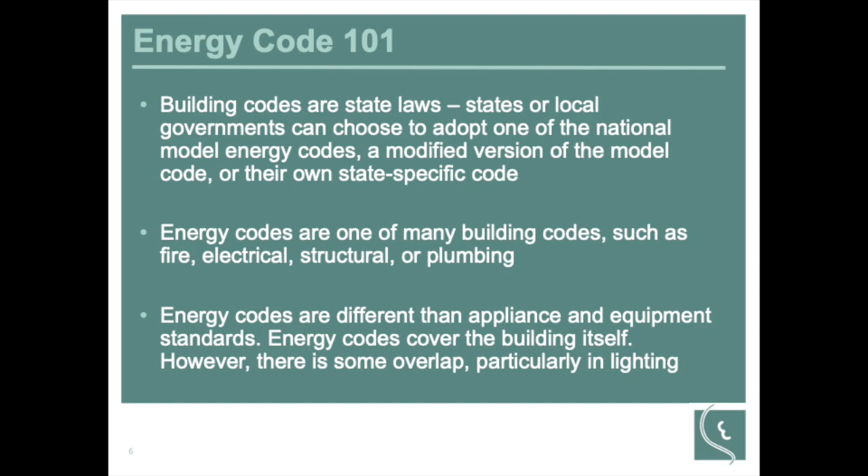To talk a bit about general things regarding energy code, we have slides explaining how energy code is developed, how it's complied with, and how it's enforced. First, the development: there's a national model code developed by two major associations, ICC and ASHRAE.

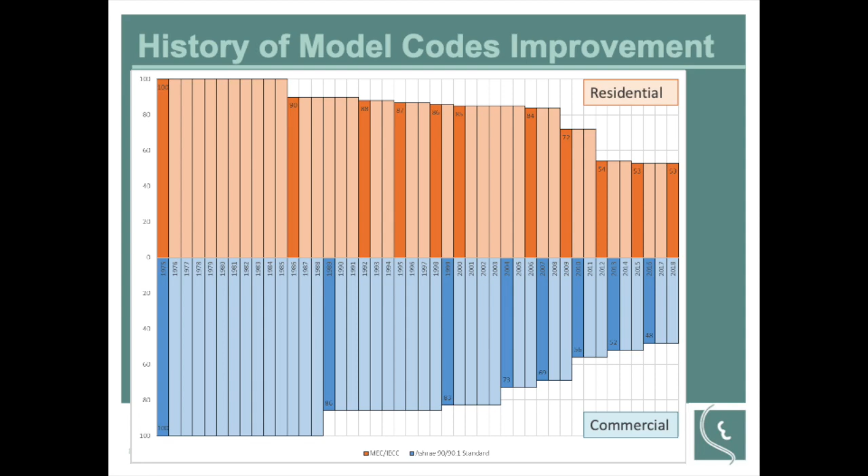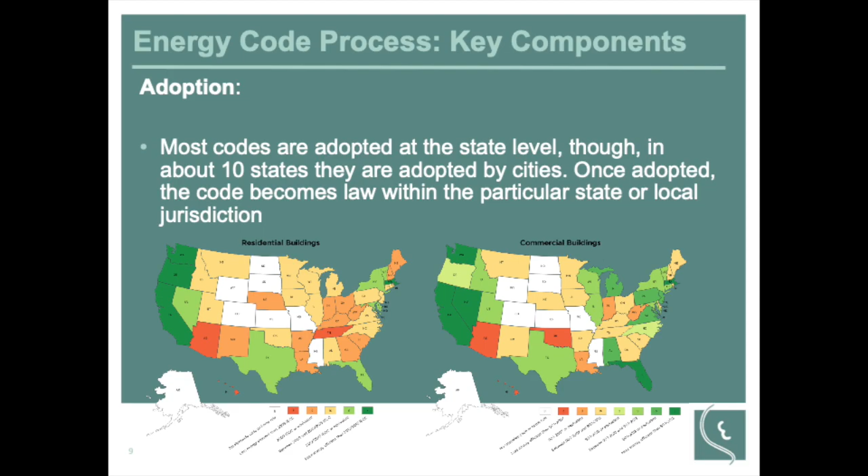So, the adoption process. I think you guys are very interested in when the new code will be effective. Until the day before yesterday, until Thursday, we'd been saying it'll be March 1st, because that's what we heard from CDB. But CDB just told us they couldn't put the energy code agenda on the JCAR meeting's February agenda, so it got pushed. It will not be March. It will maybe be April, if they put that agenda on JCAR's March meeting.

So if you hear others saying SEDAC told us it'll be March 1st, tell them that's updated now, it's not March 1st, it's maybe April 1st. The earliest could be then. CDB is in charge of reviewing and adopting, and now it's with JCAR, which just needs to rubber stamp it, but that takes some time. So maybe April 1st is the new date you need to remember.

Typically it's based on the permit application date. Any project that applies for a permit on or after the new effective date should follow the new energy code. The Illinois Energy Code explains what it is, and all buildings in Illinois should follow it. But one thing I point out is, if you're ever involved in a state-funded building, before, state buildings should follow ASHRAE 90.1, because that's what is written in the Illinois administrative rule.

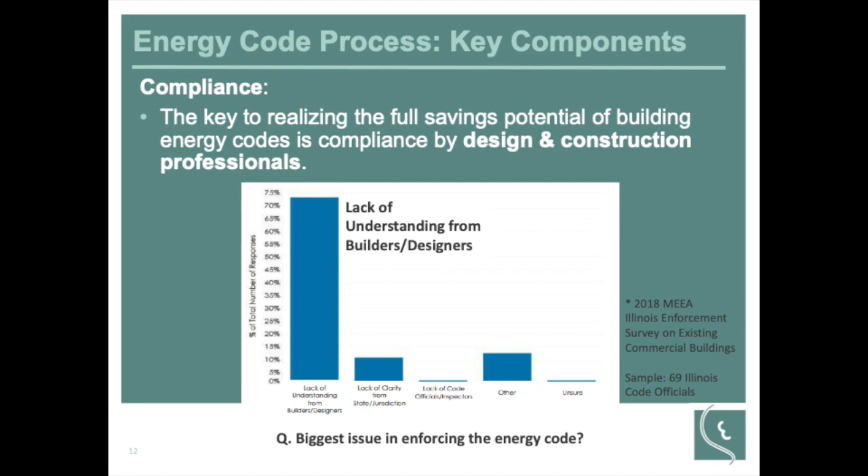So compliance. We look at a study done by MEEA - they have an Illinois Enforcement Survey on existing commercial buildings. They surveyed about 69 code officials in Illinois to find out the status of energy code compliance in Illinois.

They asked many questions, and one of them was: what is the biggest issue in enforcing the energy code? 72% of code officials said it's because of lack of understanding from builders and designers.

There are other things too - lack of clarity from state and jurisdiction, lack of code officials or inspectors, and others. But since we asked code officials, they blame the architects and engineers. I'm sure if we asked architects and engineers, they'd say something a little different. But the compliance is actually done by the architects or contractors who are designing the buildings.

So the importance of compliance cannot be overemphasized. Does this fit with what you guys are seeing in your applications, or where you run into problems? Is it just a lack of understanding, or is there some technical reason causing an issue? What challenges are you finding in the field?

Most of them don't even know. Lack of understanding - that goes to the 75%, call it what you want. Maybe part of it is, do they even realize the state has an energy code at all? Well, they realize it.

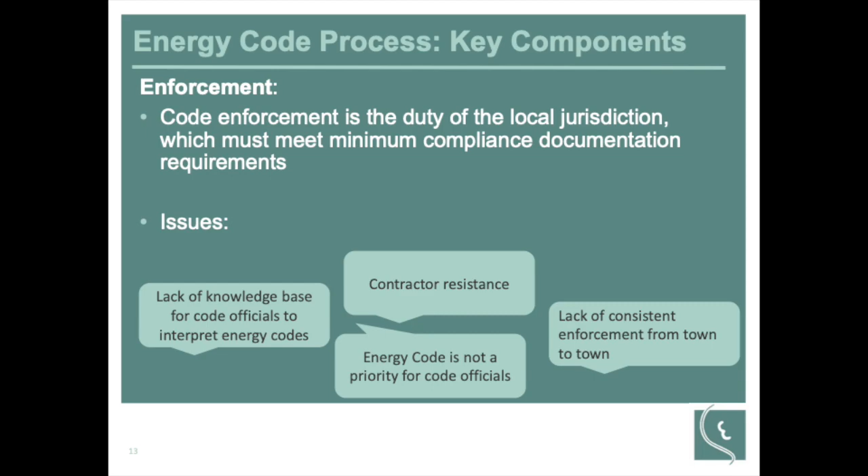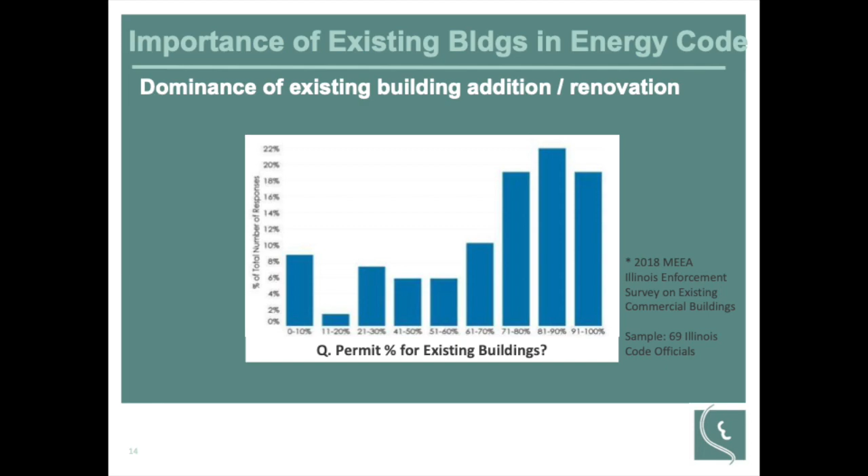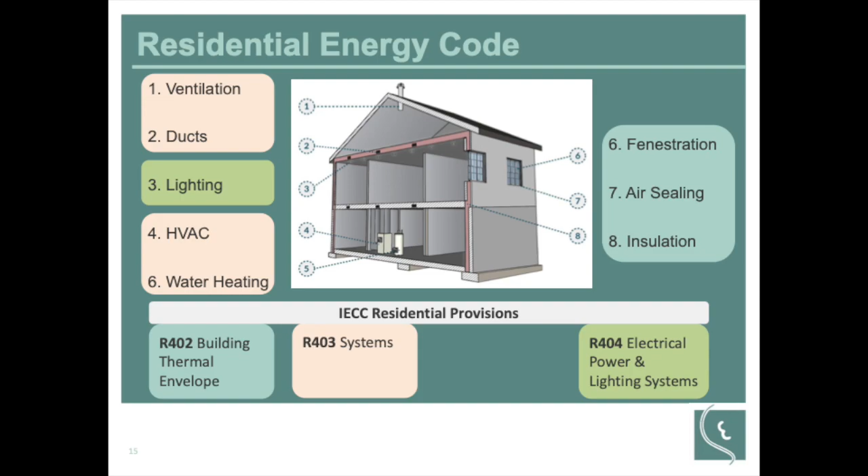The commercial code has the same 8 elements. One difference is that in the commercial code, C404, service water heating has a separate section from the mechanical system. In terms of building components, these are the main ones, and those are the sections that talk about each component.

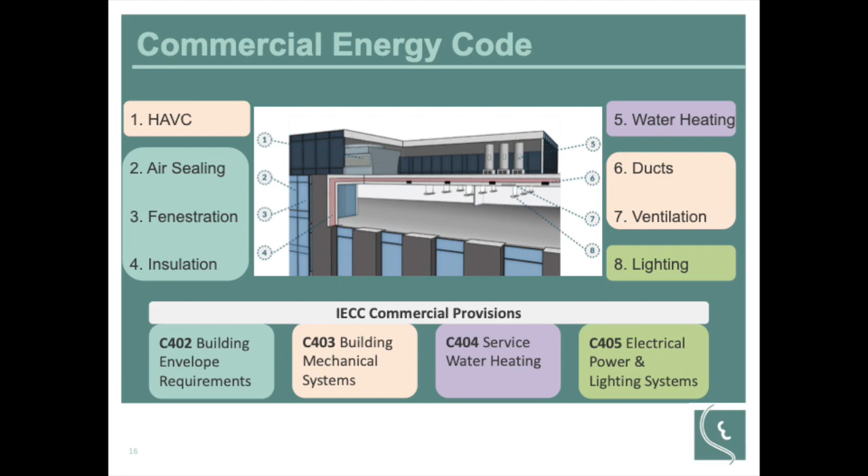For the 2018 IECC, there's a physical book, but you could also go online to our website, follow the link on the slide, and we'll post the PDF there so you can print or refer back later. If you follow this link, there's also a whole free web version of the code, so you can search through and find the exact code language. This is only the IECC.

For Illinois amendments, you need a separate source - under CDB, or you could come to our website where we'll have a link. This is the Illinois amendment, and this is the link to the 2018 IECC. To understand the whole Illinois Energy Code, you need the 2018 IECC book or web version plus the Illinois amendment. Don't forget about the Illinois amendment - it's about 15 pages, but it struck out some language from the IECC and added, deleted, or changed some numbers.

Most of the amendment language goes into the administrative chapter 1, but not necessarily all - there are some technical languages too. For example, there's one about 4 feet below grade for basement or crawl space insulation, and there's an air change rate difference: IECC says 3, Illinois used to say 5, and now we're moving down to 4 for residential. A lot of the changes are administrative, but one bigger one is the definition of a residential building, which is slightly different between the IECC and Illinois amendment. It's not a thick packet, but a lot of it shows struck stuff and what's being added.

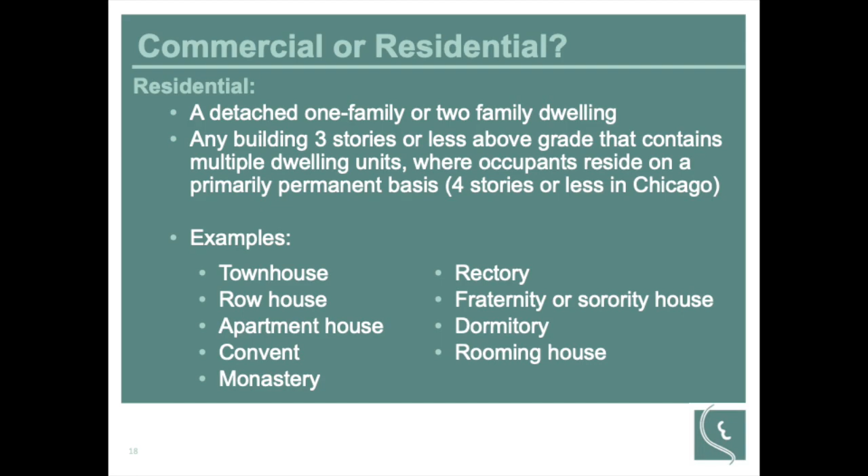What about commercial building? What's the definition of commercial building per energy code? Anything but residential building - that's literally what it says in the definition, because it's hard to define all the little things. If it's residential, fine. If not, it's commercial.

But there's also mixed buildings that have both a residential component and a commercial retail component. What about those? So this is just a quick quiz for us to remind ourselves of the definition of residential buildings versus commercial buildings.

So: a 3-story mixed-use building, 1-story retail and 2-story apartment in Bloomington - is it a residential building or a commercial building? Residential building, because it's 3 or less.

And then how about this: a 5-story single-family home. Residential building or commercial building? Emphasis on single-family, not story. Correct - yeah, it's residential. It's a little weird to see a 5-story single-family home, but if there is one, it's still residential, because no matter how many stories, it's a single-family home.

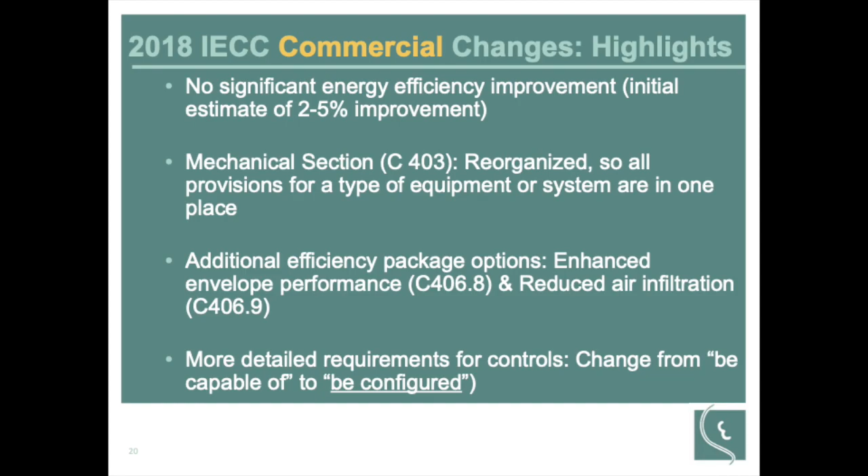Then there's a new appendix in the 2018 IECC. It's called Appendix CA, a Solar Ready Zone, in the commercial section. This appendix was already there in the residential section in 2015, but it's new to the commercial section in 2018. What it is, is it's not a mandatory or required section, but it is an appendix.

It's a reference for future solar projects. These days there are lots of projects thinking about solar, maybe not now, but maybe later. So this is some kind of guidance you could look up to if you are thinking about a solar project in the future for the project. If you are in a municipality, you may be able to make this a mandatory item, but it's not required per Illinois State Energy Code.

And then ASHRAE 90.1 — today's workshop we are mainly talking about IECC, but we are also talking about ASHRAE 90.1 because it is one compliance path that you could choose. I told you that to comply with the energy code, you either follow a prescriptive path or a performance path. For commercial, you actually have three options: you either go prescriptive, performance, or you can close this book and open up ASHRAE 90.1, because ASHRAE 90.1 is one compliance path that IECC says is okay. So in a way, you could comply with the IECC using ASHRAE 90.1. A little confusing, but anyway.

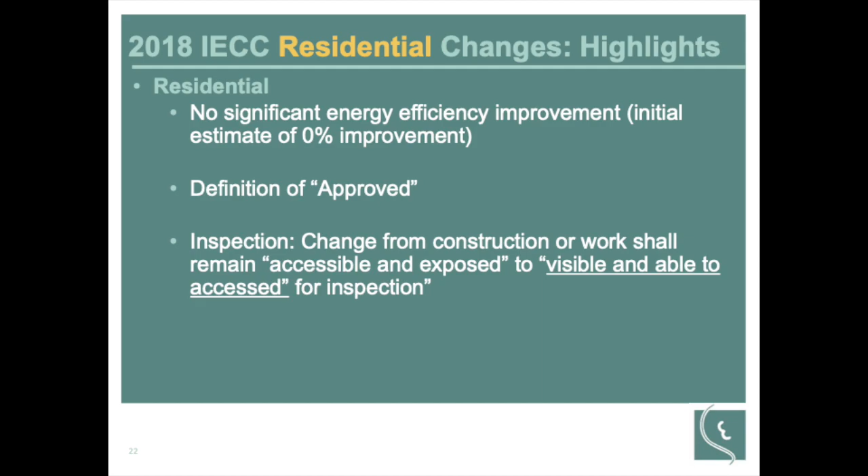So now as a code official, you have more authority and more responsibility, and it doesn't require going through any testing. If you deem that this is acceptable, then it is approved per code. And then for inspection, before it said accessible and exposed, now it says visible and able to access. It's kind of the same thing, but they tried to make it easier to understand and clear.

So that's the 2018 IECC updates. I think from here we're going to talk about component by component requirement changes, and Brian is ready to take over. We're trying to give you details here, realizing this is more of a beginning. This gives you a layout of how the 2018 code is laid out. Sumi mentioned earlier that several of the HVAC measures have been rearranged, and I've found that using the code, it flows a lot better in the newer version versus the older one.

Trying to look at just mechanical systems versus service water heating. In residential, they consolidated because there's almost nothing in service water heating for residential. On the commercial side, something we talked about is why should someone comply with an energy code? Other than, yes, it's state law, the energy code is really more about looking at building science and safety, because there are certain things, like noting here, there's a change as far as if you're doing a heated slab.

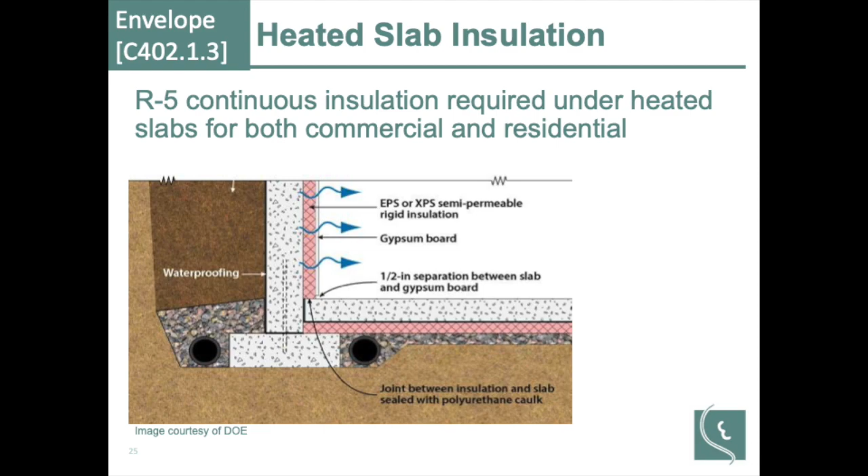This is another one: the IECC calls out combustion appliances and building sealed combustion rooms, basically for appliances that are using outdoor air. From a building science perspective, if you're pulling outside air in for combustion, that room is likely to be at kind of outdoor conditions. So the idea is to thermally isolate outdoor conditions from indoor conditions. The code makes it easy in that if you use sealed combustion appliances, you've provided that isolation.

Illinois has removed this section for both the 2015 and 2018 versions, purely because they look at it and say it costs more to build the building that way. That's true, but again, the code gives you an option as far as a way to get away from having to build that room.

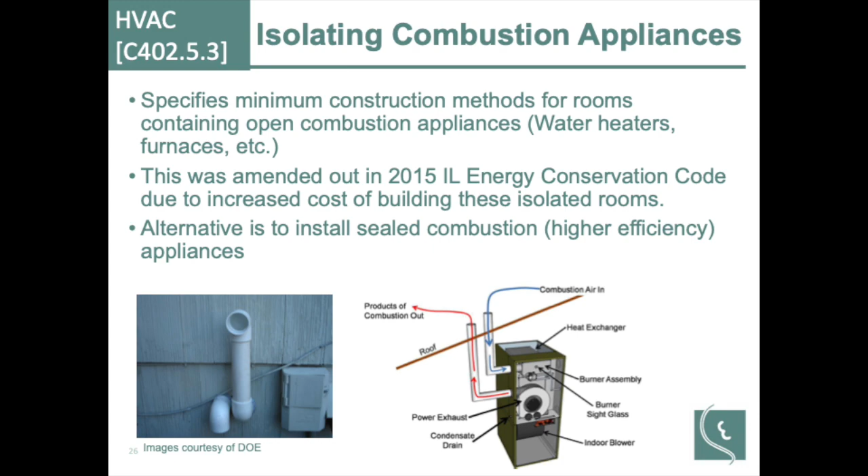Now, VFDs - these are getting more and more common, less and less expensive, so they continue to expand. The code is finding they're more cost effective to put in more places. This used to be upwards of 5 and 7.5 horsepower where it required a VFD. Now it's starting at 2 horsepower, so once you're at 2 horsepower, you have to start putting in VFDs. A lot of what we've encountered isn't so much from the energy perspective, but from reducing surge on buildings - rather than putting a starter in, people just throw the VFD in. It's about the same cost, and they move on.

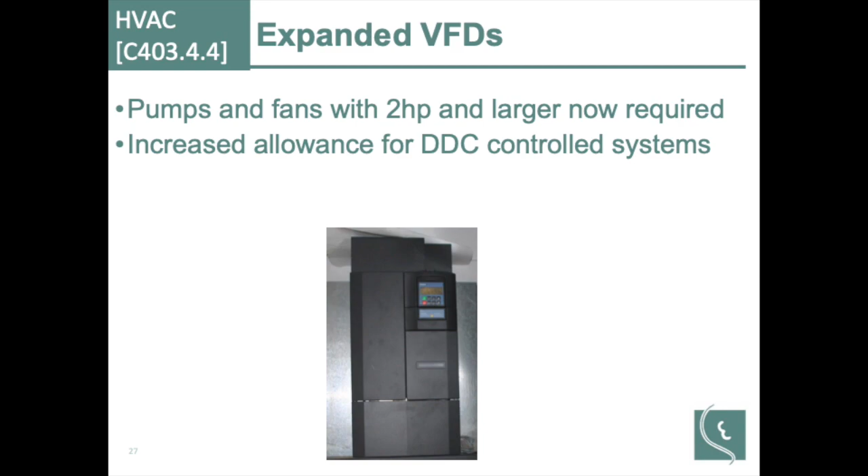That can be real problematic if you oversize your HVAC, which I'm still trying to get a good explanation for - in a good design with a variable air system, why should I ever actually need reheat? To me that's just covering a bad design. From my perspective, if I don't need heating or cooling, turn off the air, because I probably don't have anyone in the room.

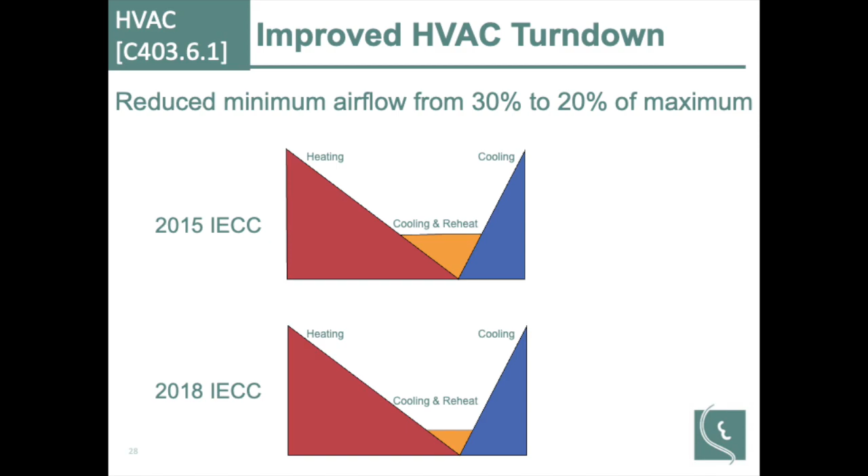Some of this is looking at tying it to occupancy sensors so that if there's no one in the room, you don't heat or cool it unless it really needs it. Adding automatic control for heating and air units for hotels and motels of 50 guest rooms or more is one way to do it. Has anyone stayed in a place with these? I've seen them in a couple places - it could be a key card slot at the door where you put your key card in, so you also don't have to worry about whether you left it on the dresser - it's right there by the door. It could also be done through a hotel management system with occupancy sensors. I actually just stayed at a place last week that had an occupancy sensor for the HVAC - that's interesting and effective. Again, it's trying to figure out how we get better when people aren't in the spaces.

Vestibules - this was another thing we've had a fair bit of discussion over the years about, as far as how you best control them. We've seen different operating parameters, one being that you overheat that space in the winter so that when the door opens, you don't get that blast of cold air coming through, providing that buffer. The code has finally given direction on this: designing vestibules to be tempered spaces, trying to create a buffer between the inside and outside, just using them as a tempered space.

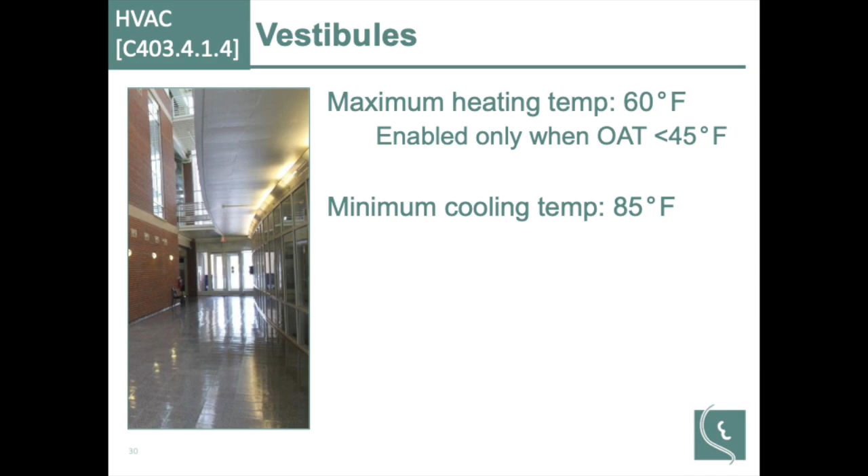Luminaire level lighting controls - this is where rather than having centralized lighting control systems for larger buildings, each fixture has its own control. Typically they'll have their own occupancy sensor and their own photocell for daylight harvesting controls.

In order to qualify for this, they have to have wireless reprogrammability, because with these you can also typically tie them to switches or group them together. So if you have open plan offices or spaces you may reconfigure, this might be a good feature - saying today these 4 lights are part of someone's office, but a couple years from now I may have shrunk the cubicles so they're independent spaces, and those 2 are now a hallway and these 2 are independent offices. So having that ability to change going forward.

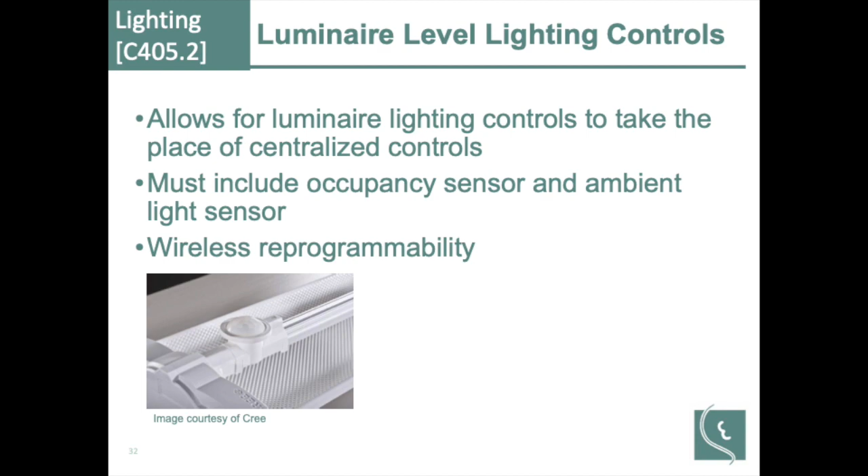Occupancy sensors continue to advance and be found in more places. Starting with 2018, open offices have to have occupancy sensors now. This is for open offices over 300 square feet, and each zone cannot be over, I want to say, 600 square feet per zone. So it can get a little hairy.

This is now where occupancy sensors are required. We've had classrooms and training rooms for a while, break rooms. As you go through this list, then you have this lovely catch-all, other duties as assigned if you will - other spaces less than 300 square feet. So with this, there's not a whole lot of places that don't require some kind of occupant sensing technology.

Now that is one difficulty I run into when trying to read some of the codes - the code will frequently talk about occupant sensing controls, which is not necessarily an occupancy sensor. It could also be a vacancy sensor. So the lighting controls people have come up with these two terms: occupancy sensor and vacancy sensor. But the code lumps all of it under occupant sensing.

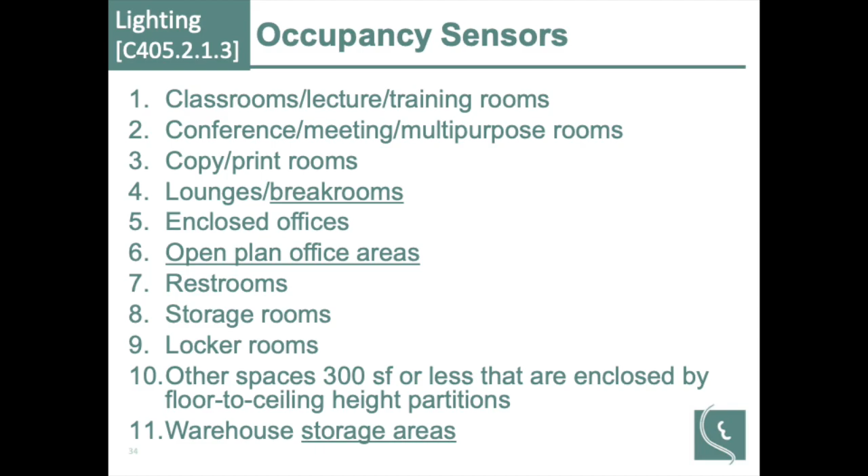Are you familiar with the difference between those two? An occupancy sensor will automatically turn the lights on when you walk into the room and automatically turn them off after you've gone. A vacancy sensor, you have to manually push a button or flip a switch to turn the lights on, and it will automatically turn them off after you've gone. So one is automatic on and the other is manual on. Both fall under the term in the code, vacant or occupant sensing control, because both of them do sense occupants. So it's a little bit tricky.

The few places we've come across that don't require it are patient care areas where patient care is directly provided, stairwells, and some hallways. But most rooms now require it.

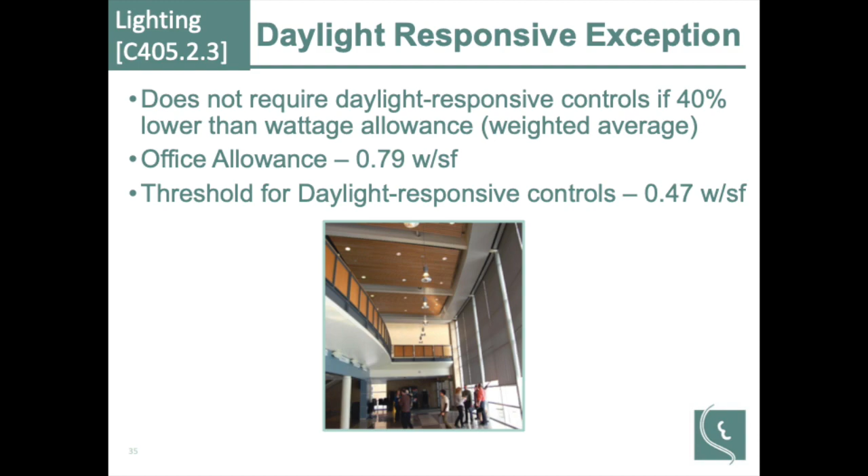Daylight responsive - this is one area I always like to call out the exception, because if you go through and use this exception, it makes your life a whole lot easier. It allows you to eliminate the requirement for daylight harvest or daylight responsive controls. What it does is, if you reduce your total power density by 40% of the weighted area of the daylit zones.

What does that mean? So for an office building, I'm at 0.79 watts per square foot. If half of my square footage is in the daylit zone, and I take my total building power budget for lighting and reduce it by 40% of 50%, which is 20% - so if I go from 0.79 to under 0.63, I'm done with daylight harvesting controls. Don't need them, which means I don't need to buy them, install them, or commission them. And I don't have them there to break.

So frequently, as building code people, I think we naturally don't want to use exceptions. This is one I'm like, please use it, because it simplifies your life.

Any reasons why they came up with this 40% number that you have to reduce your lighting power by 40%? Any suspicions as to why that might be?

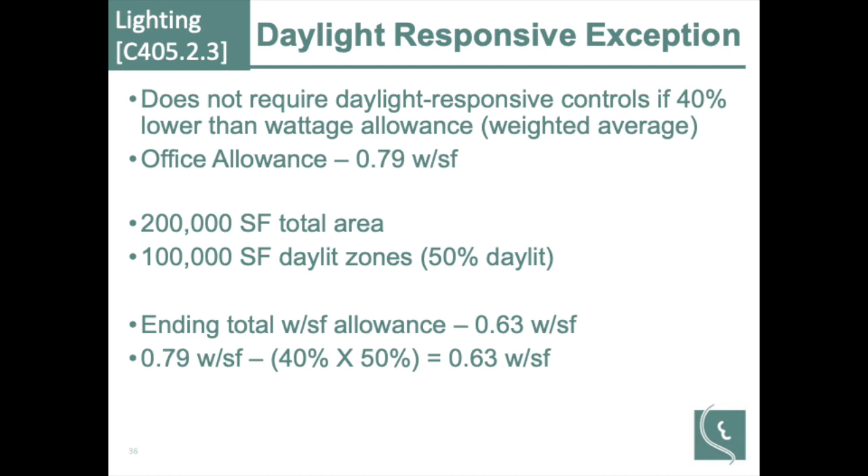Exterior lighting controls, this has increased in stringency. Previously, you had to have either daylight shut off or a photocell, or time switch controls. With the 2018, you now have to have both. Now it could be one control, or it could be two controls in series. So you could put a photocell with a timer and meet the requirements.

Decorative lighting has to be turned off during non-business hours, and the code does give a couple of different ways of determining what is non-business hours.

And there's a lighting setback for non-landscape lighting. So your parking lots and things like that requires 30% of the wattage to be reduced. So that could be dimming them, or turning the far ones off, the ones further away from the building, overnight.

This is one area that I think might be beneficial to look at, perhaps a possible zoning issue, or looking at trying to do across the board standard rules and say, okay, I'm going to take this guidance for new construction and make it part of public policy. Because, looking at it, does it make sense to light everything up when no one's around?

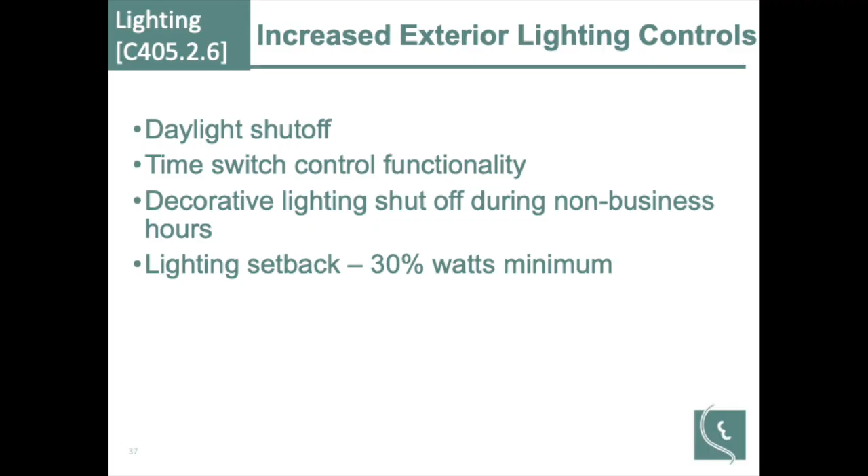When calculating budgets, this was one big change. Now the NEC for track lighting says 75 watts per foot. Well, the energy codes have said 30 watts per foot, and now in the IECC, they're going down to 8 watts per linear foot of track.

Any suspicions as to why that's going down to 8 watts? If you tried to put 30 watts of LED lighting on a track per foot, on every foot, that'd be one bright space. So they've looked at it and said 8 seems to be a reasonable number where you can get plenty of light and still be at 8 watts per linear foot without going crazy on light. This also helps when you're doing your budgets for places that have flexible track lighting.

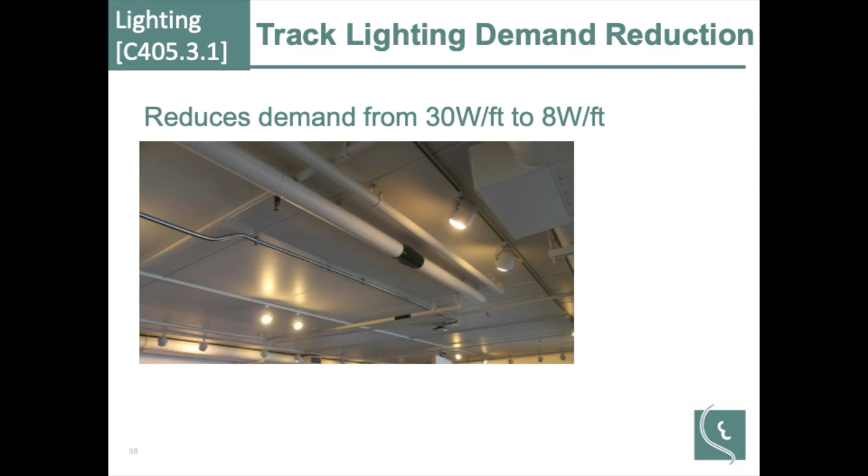They're slowly coming down in lighting power. LEDs keep getting more efficient all the time. So offices, a little bit of a reduction, 4%, yay. Libraries is the big one, dropping from almost 1.2 down to under 0.8 - over a third reduction.

Part of this is you think about what a modern library looks like compared to an office space - a lot more computers, a lot less in the way of stacks and stacks and rows and rows of books. When you think about how much air conditioning load that is you're no longer having to budget for, because in some of your designs, if you're budgeting as part of your simple HVAC design, you might say, well, I know the lighting designer could give me 1.19 watts per square foot - not sure what he's going to come up with, but I'll start there. That's a lot of air conditioning load that you can end up with.

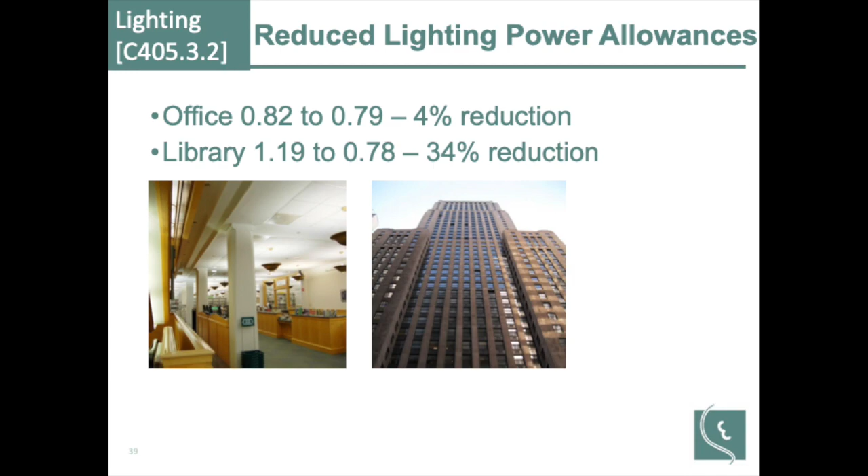Motors and transformers. Transformers are now DOE 2016 is the new minimum standard for transformers. One problem here.

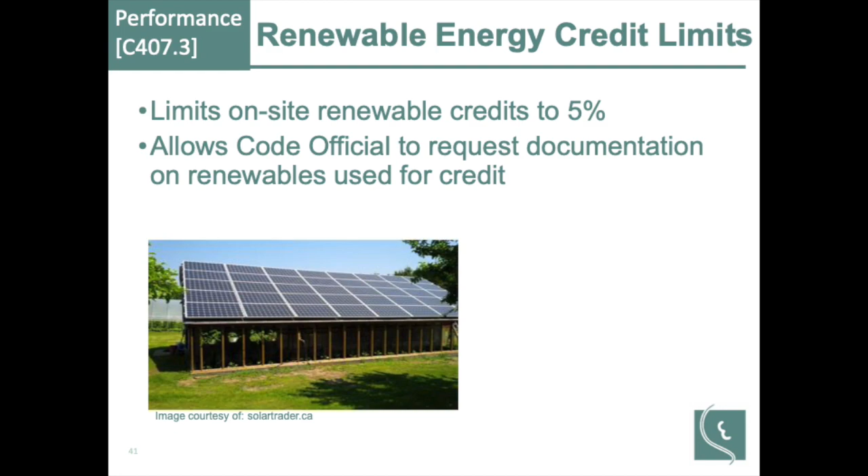Maintenance and commissioning - the code now requires operations and maintenance manuals to be provided to the building owner. It also requires that they provide a list of the normal O&M things you need to do. As part of that, it can say change air handler belts twice a year, but I have to tell you which book and page to go to find belt size, belt tensioning, any steps involved. So I don't just say you need to change the belts - I have to tell you where in the documents to go look.

Because almost any building that ends up with O&M documents, it's just a giant stack of binders. It's like, well, that's great - where do I find it? So this has to be provided.

This is one of the difficult areas because it's within 90 days of the certificate of occupancy. Well, your jurisdiction typically stops at certificate of occupancy normally. So to say this has to be provided within 90 days after the date at which I'm done - I'm not sure how you can basically tell the building owner, you better be expecting this. If not, go after your contractor and get this from him. That's a little hard because you guys probably aren't dealing directly with the building owners.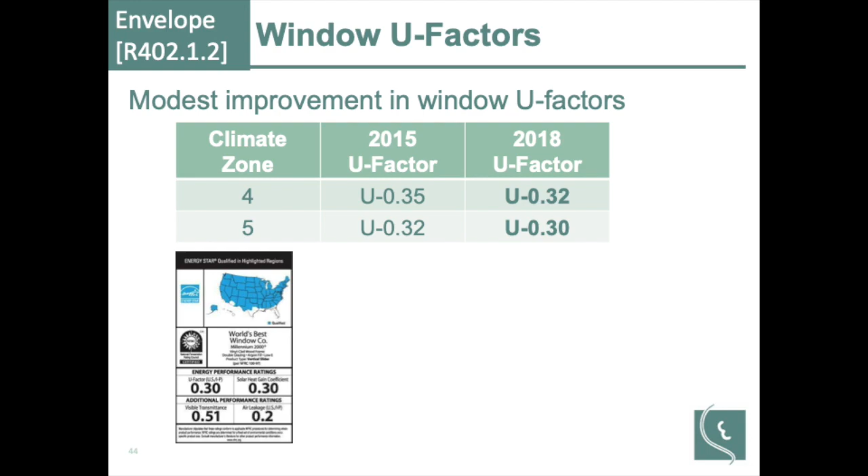Ducts in conditioned space: the code now provides additional criteria for determining if ducts are in a conditioned space. Obviously if it's totally inside the air barrier, it's inside the conditioned space - that's the easy one. Or it's buried in the ceiling insulation and meets those requirements.

Now, duct leakage testing for normal ducts is 3 CFM per 100 square foot, so this is half the normal allowable limit. So you need tight ducts, full depth insulation, and the air handlers inside the air barrier. That's the provisions they provided as far as conditioned space or not.

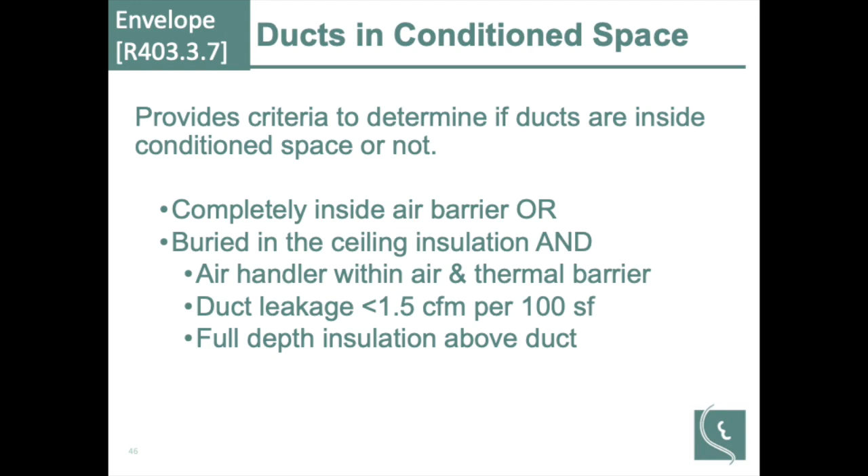Residential high efficacy lighting is now up to 90% of the lamps and fixtures installed, up from 75%. And this is the big one - the low voltage exception is gone. That's common where we'd say, oh, we got all this track lighting with all those little MR16s, well, it's low voltage so it doesn't count - that exception's gone away.

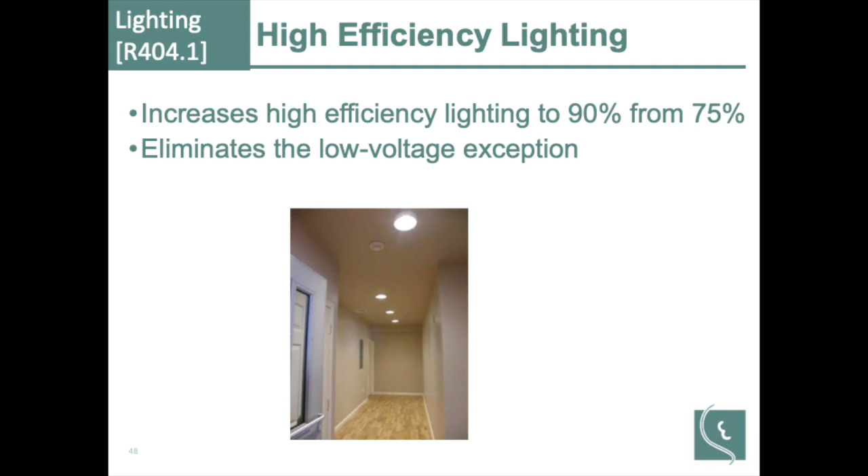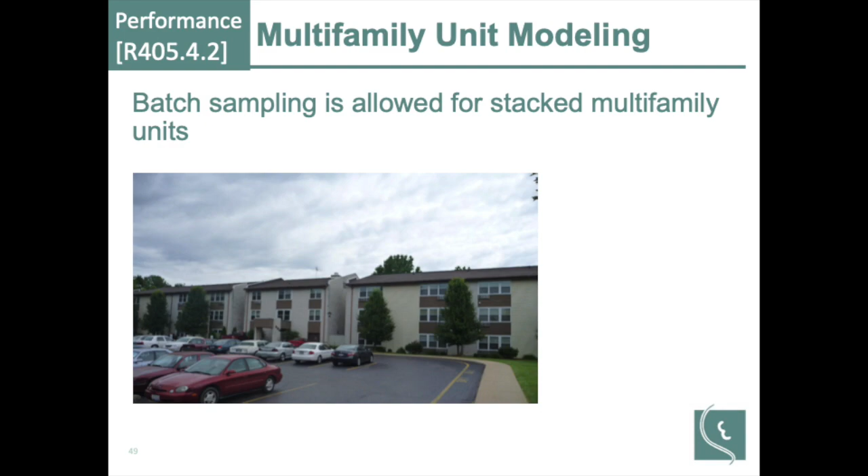Multifamily - not sure how frequently you guys run into this, but for people using models, it allows batch samples to be used. So if you have 2 identical units side by side, basically totally designed the same, they only have to submit 1 model and just say this covers both units. Before, they had to model each unit. This makes more sense since they're identical - I'll just tell you that's unit type A.

Energy rating index - have any of you dealt with HERS ratings much at all? Had any done? This is one change they made, which actually reduces how stringent the HERS rating system is. We believe this is trying to help encourage people to use the HERS rating system, so by reducing the stringency, hopefully they'll get more people to use it.

To be totally honest, I wish every for sale sign had to tell you your energy bill right under - last year's energy bills. So it's like, oh, I don't want to pay that every month.

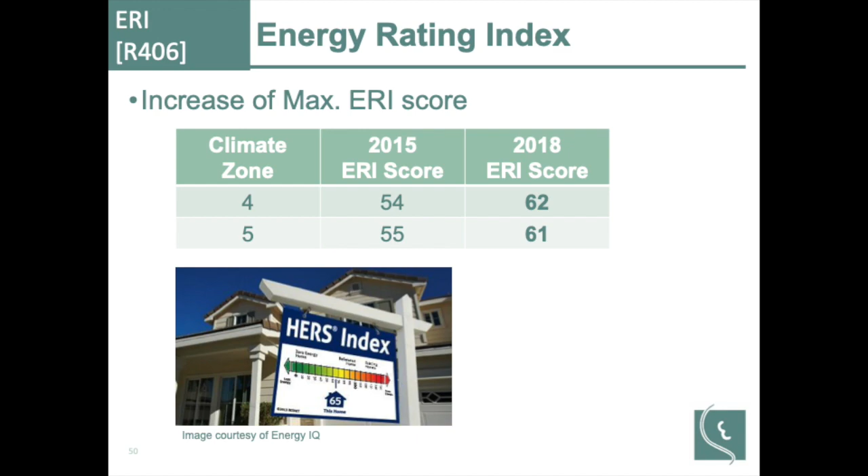This was, I believe, new in 2015 - existing buildings. So now the energy code covers existing buildings as well as retrofits, or provides a separate section for it. Basically noting you just conform to the new construction requirements, but you don't have to change anything that's unaltered. So if you're changing the lighting in the room, okay, the lighting has to comply, but you don't have to do anything about the wall insulation. Or if you're doing a new flat roof, okay, you've got to bring the roof insulation up to the requirement, but you don't have to pull the HVAC equipment to do it.

Now you end up, because of some of this, saying well, okay, in order to bring the roof insulation up on that flat roof to a code compliant level, I need to add 3 inches. Well, because of the curbs and the parapet walls, I only have room to put 1 inch of insulation in. Okay, give me the 1 inch then, because that's the best you can do with what you have without having to touch your unaltered sections.

Now, I would imagine for HVAC it would be nice to lift that stuff up, if nothing else, just for the technicians to work on it a little easier. But that's something where you say, again, this is existing construction - there wasn't an energy code in the 50s or 40s. And so it's about saying, okay, how do I make it the best I can with what I have?

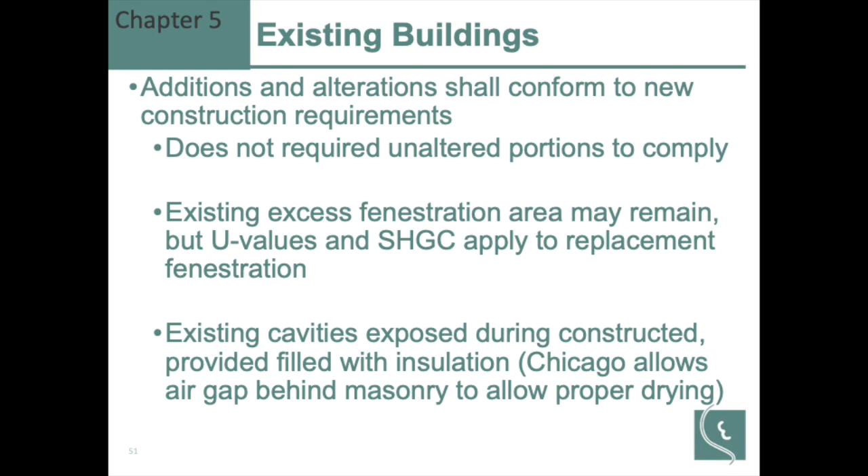So if you have any other questions, challenges, issues, problems you want to solve? Sometimes code officials send us drawings, and architects and engineers too, like a COMcheck or REScheck report, and say, hey, this is what I got, I'm not sure what do you think? Of course we don't know the answer all the time. Internally we have a team of people looking at the same thing, scratching our heads and trying to come up with the best answer. I think it's better to have more people thinking about one issue.

So if we cannot provide you one perfect answer, we'll try, so let us know. I did mention the code now, in the residential section, requires posting a report of the major building components, things like attic insulation levels, fenestration U values, and solar heat gain coefficients, and it must be displayed in a permanent location. Normally we'll see it next to the service panel or on the back of the service panel cover.

It was put on panels, and then people ended up changing it. The important reason the code calls for doing that is that little U value sticker that was on the window when it was delivered is long since gone. So if I break a window, I need to make sure I don't put in something that is a worse window than was there before, because I may throw off my heating and air calculations and end up short if I put in a worse window.